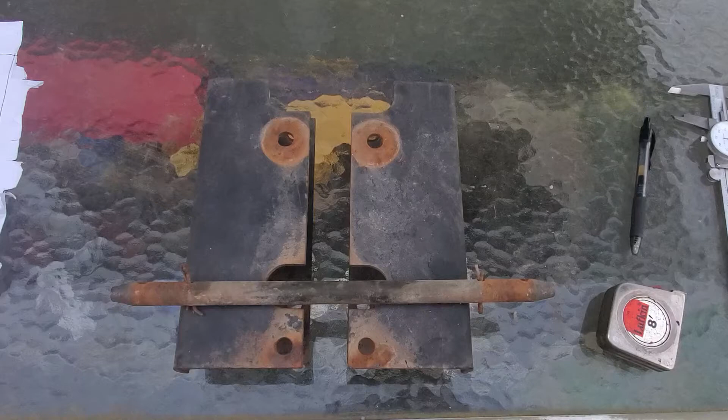Okay, everybody. This is going to be a video giving some of the measurements and dimensions of the hitch adapter for using a suburban style 3-point hitch on a more modern Craftsman GT with the slanted hitch plate on the rear that normally just uses a sleeve hitch. This is the adapter to use a 3-point on those.

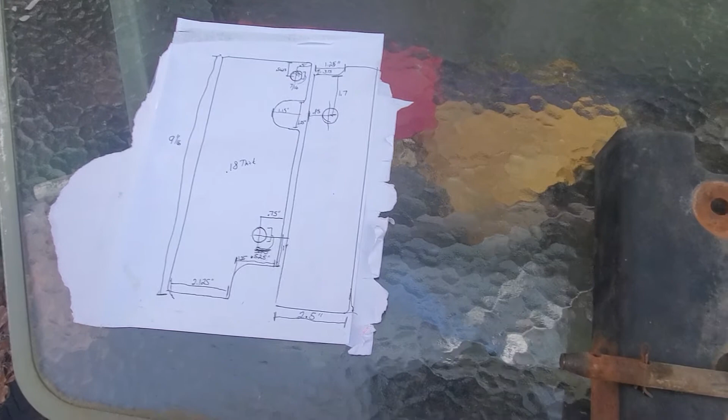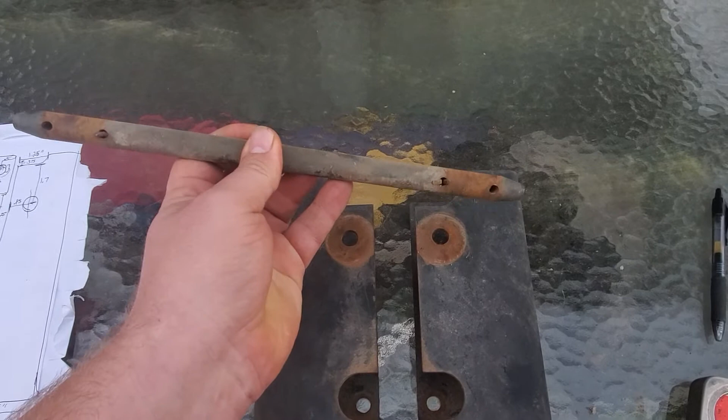So you'll have to excuse some of my measurements. It's kind of quick and dirty, but I'll do the best I can for you. First off, it's just a 1 foot long 5/8 rod for your stabilizer bars. You actually have to put a cotter pin on the inside wall and on the outside wall to keep it from just falling out.

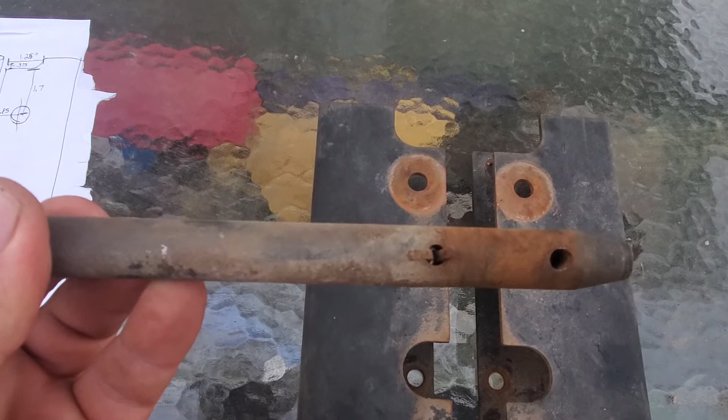So the furthest inside pinhole here with the cotter pin already in it is, I believe, 2 inches in, and the second one on the outside here is about a 1/2 inch, 3/4 of an inch in. It basically just has to keep it right here so it can't fall out either way. Okay, so that's out of the way. That's 1 foot by 5/8 rod.

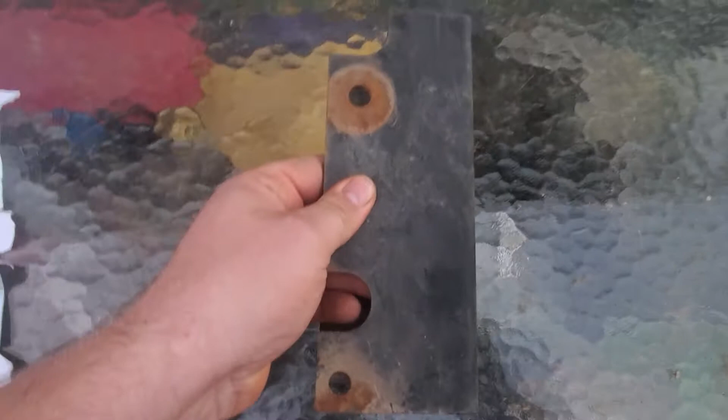Okay, now all the measurements that I give on this are going to be off of one piece. So take those measurements and mirror them to get the other piece, because these are just an exact mirror copy of each other. All right, so we're going to get started. I'm going to use this piece to start off with. All right, let me grab my pen, and we will start with this bolt hole here on the bottom.

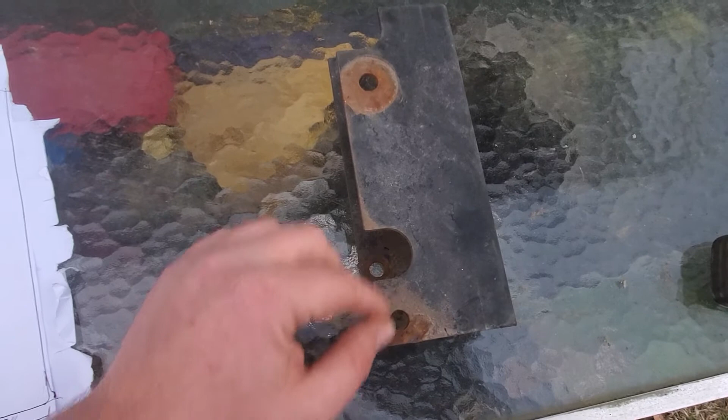This is as it would sit on the tractor. It would be sitting at an angle like this. This part in the back would actually mount to the hitch plate that's already there, and then your 3-point hitch would mount to these two holes. But you have to use on this edge, and I believe on these ones too, those funny wedge style shim washers to give it the proper kick and angle that you need for the lever to clear everything when you move the handle. But I'll get into that later.

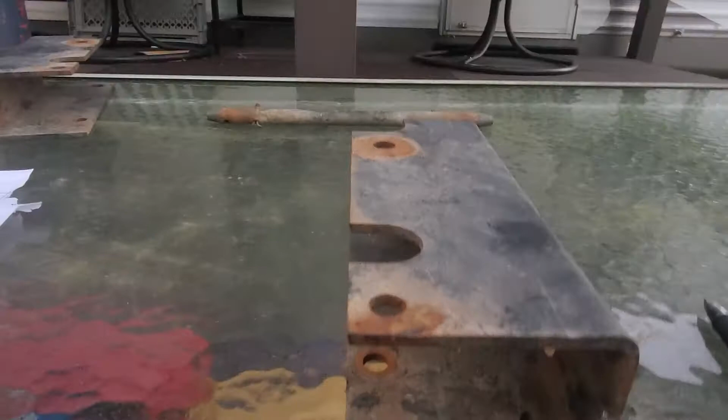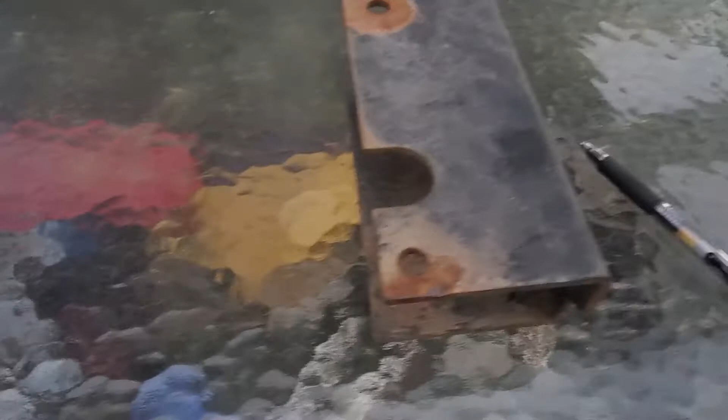First off, thickness of material. The total thickness of the metal here is 0.18 inches thick. Total height from bottom to top here, this is 2.5 inches tall. Okay, the width of it on both pieces, from this edge all the way to the outside edge is 3.5 inches. So it's 3.5 inches wide and 2.5 inches tall.

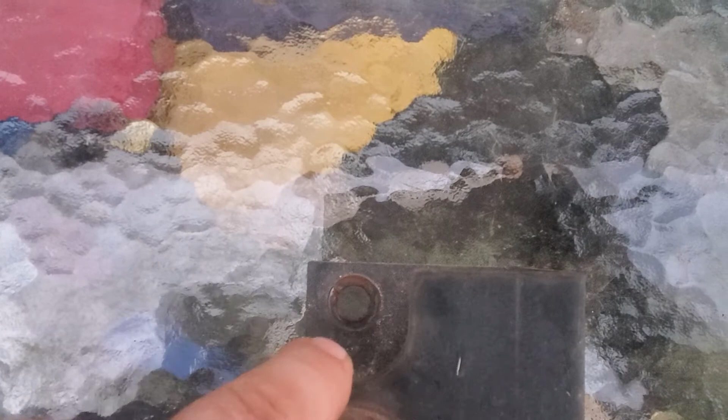It has some weird cutouts. It's got this cutout here so you can get a socket onto this bolt. And if you look on the back side here, it's got this cutout here, and I believe that's to clear the little flat place where you'd hook like a yard cart to. But the longest part of it from this edge up to the top edge, that total length is going to be 9 1/16 inches from top to bottom. 9 1/16. All right, moving along.

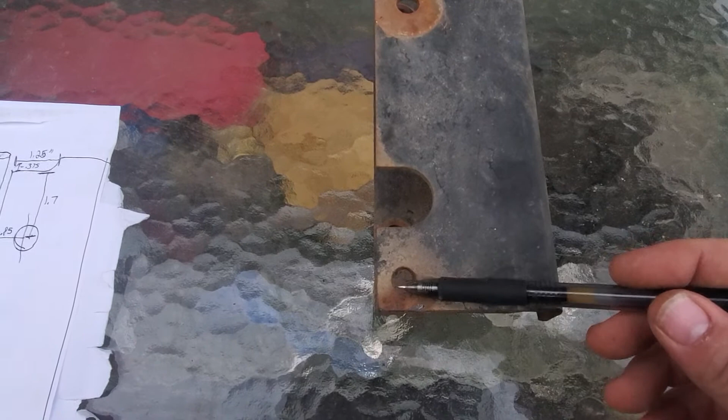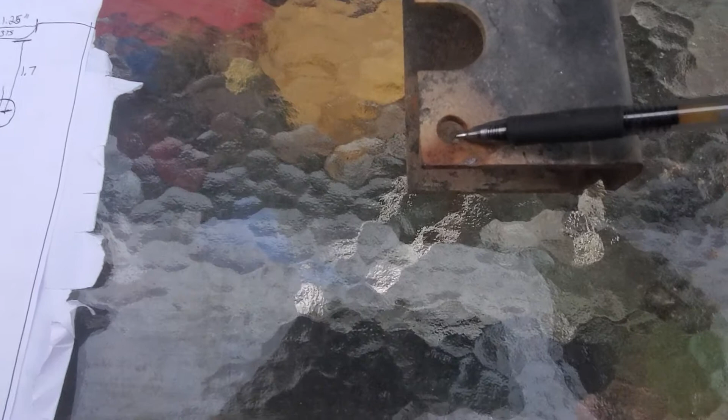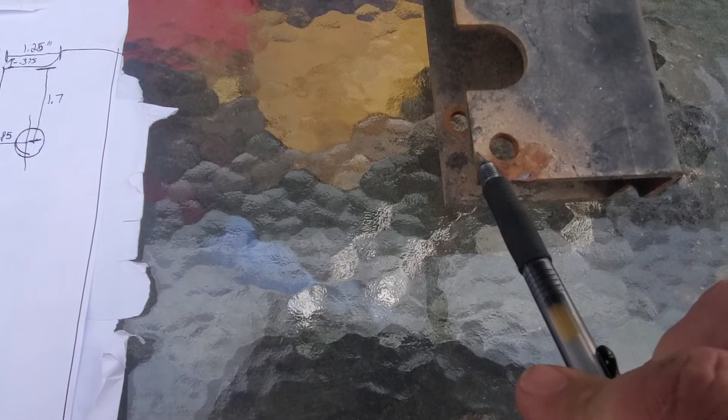The holes on the outer facing part, where you're going to mount your 3-point hitch, are this hole and this hole. So this bottom hole here is a 7/16 hole. Like I said, this is the best I could come up with, just quick and dirty measurements with a caliper and a tape measure. 7/16 hole. It is from this edge to center 0.5625 inches. From this edge to center 0.5625. From this edge to center is 1/2 inch, 0.5 inches.

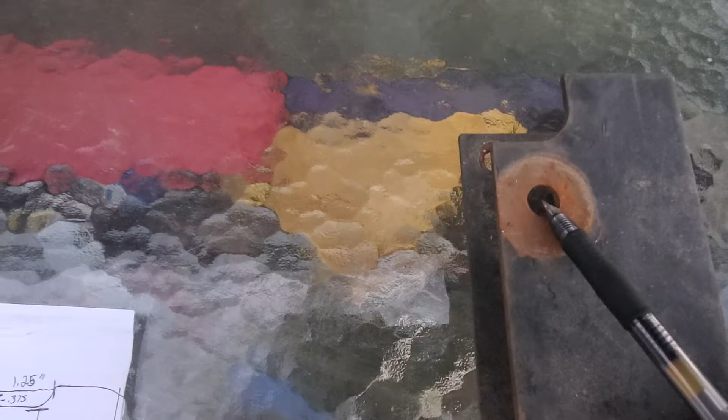All right, we'll do this one next. This hole is from this edge to center 3/4 of an inch. And from this cut to center is 1 inch. From this cut to center is 1 inch.

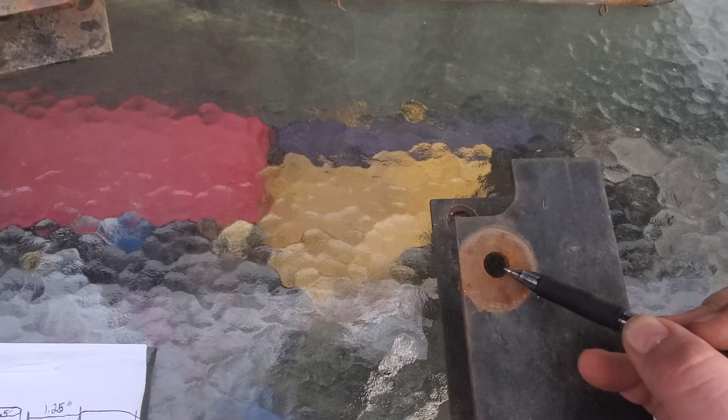And sorry, I took a measurement of this hole, and it is 0.505 inches. So you could probably get by with just doing 1/2 inch hole here and 1/2 inch hole there. I'm sure there's probably some wear on this hitch and the manufacturing tolerances, who knows what they were. So probably could just get by with 1/2 inch hole and 1/2 inch hole. Okay.

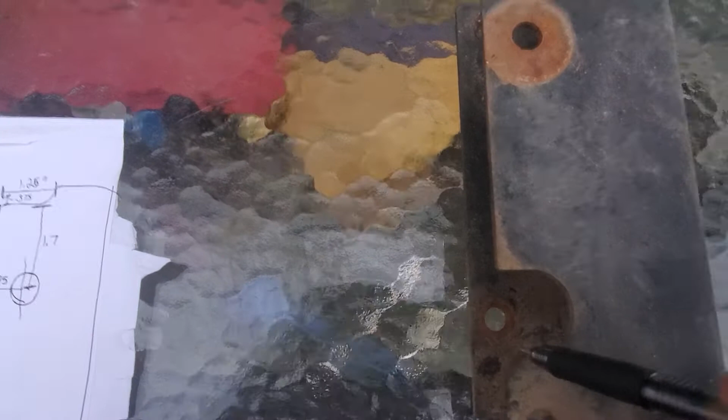This weird little cutout here is just so you can get a socket down onto this other bolt, because this is what actually bolts to the hitch plate on the tractor. So you could just make it whatever you need it to be to clear a socket to get to that bolt. But if you want to do it as close to the factory spec, and to what I measured, as possible, this gap from here to here is 1 1/4 inches, and the depth of it from this imaginary edge to here is 1.15 inches.

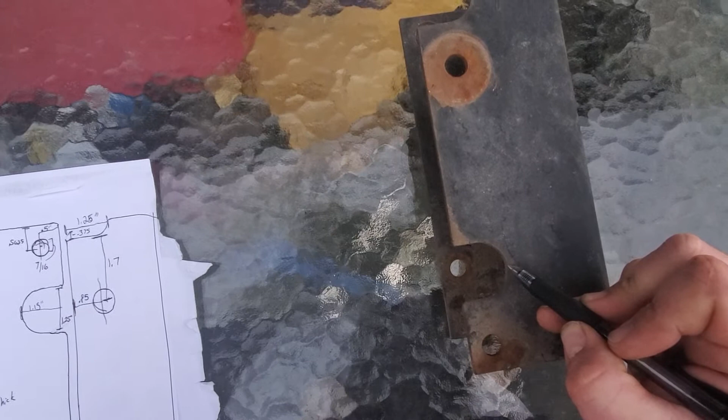I didn't get a measurement as to where to start. I can go ahead and do that right now. Let's see here.

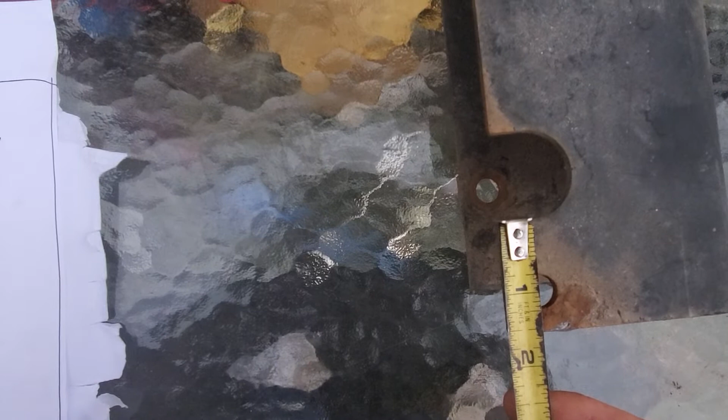All right, that edge is going to be, let's see here, 1 and, is that 5/8? Yeah, we'll call that 1 5/8. 1 5/8 to start this edge to cut, and you make it around. Okay. This little notch here, same deal, is just cut out to allow you access with a socket to this bolt.

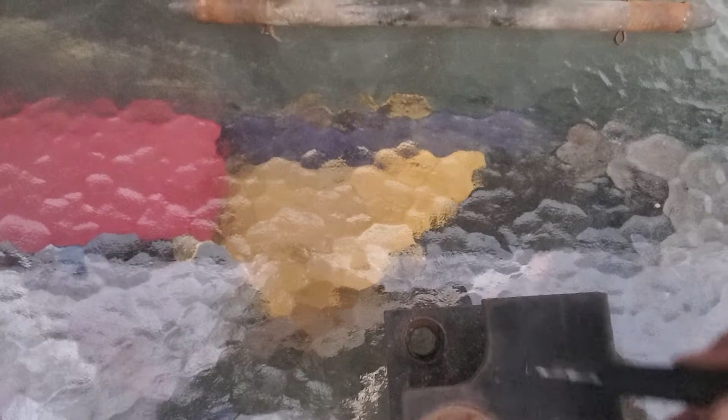This cutout is, let's see here, depth from this edge to square with here is, shoot, didn't measure that one either. Okay, this corner to square with here is 1 1/4. Now, I'll bet, let's see, yeah, 1 1/4, 1 1/4. So you just make this 1 1/4 square cut, and you can bevel it however you need to. If you don't want to, I don't care. All right, let's see here.

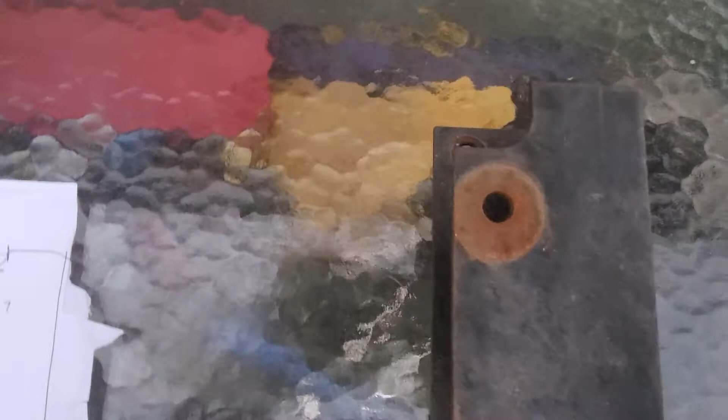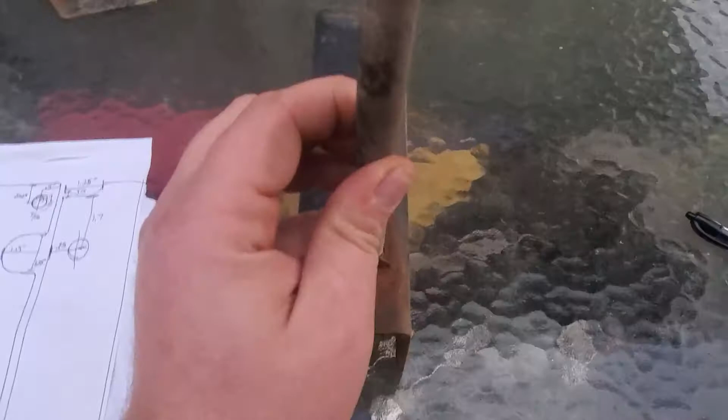Now we're gonna roll this. All right, this is where your 5/8 dowel is gonna go through, and you can see you got to put it in from the inside first, and then assemble the 2 halves of the hitch on top of the pin.

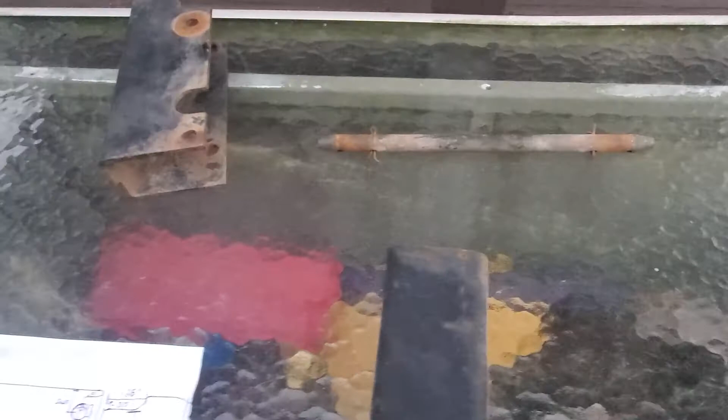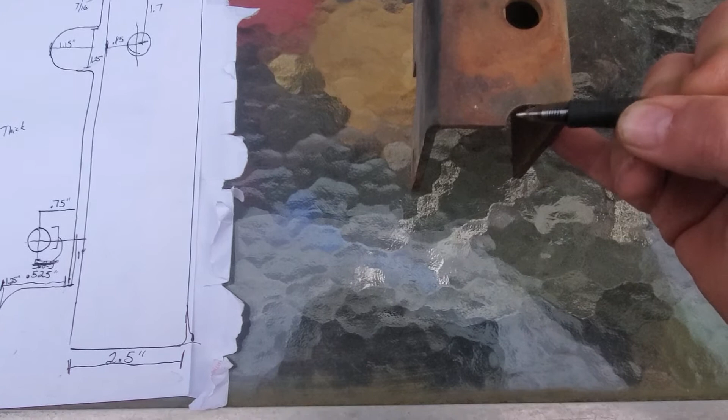Okay. This little cut here, this one here, is, let's see, from this edge to the outside edge of here is 1 1/4 inches. And the height of it, this gap here, is 0.375 inches. Okay, now we're going to continue to roll this.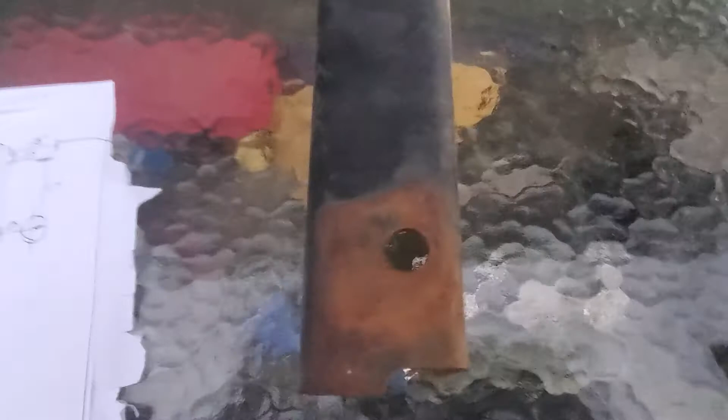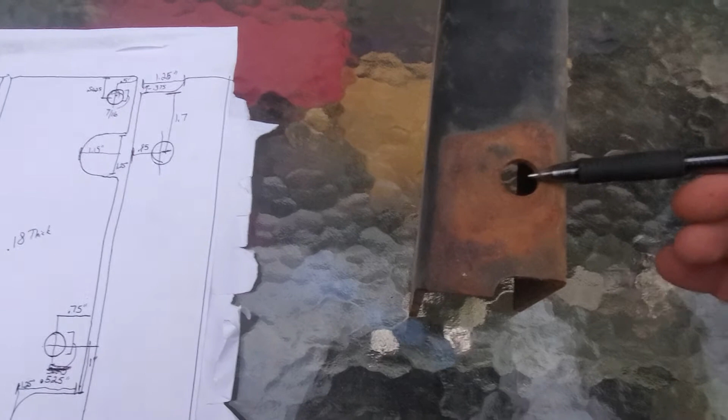Oh, this hole here, that's just a 5/8 rod has to go through it. So you can drill it whatever size you want to accommodate the 5/8 rod, or depending on if you're going to try to put like a true cat 0 on there and you're going to change the size or something.

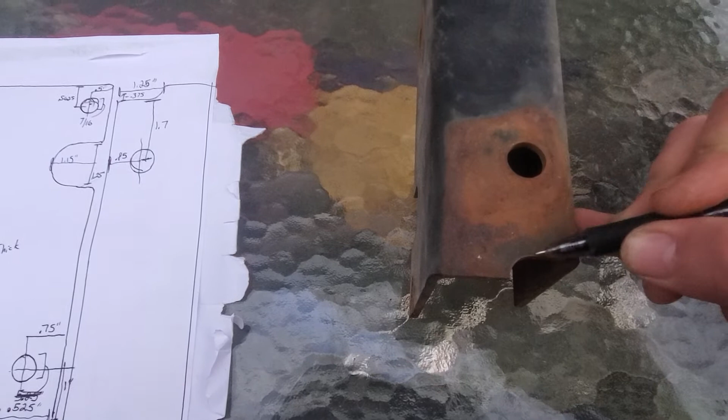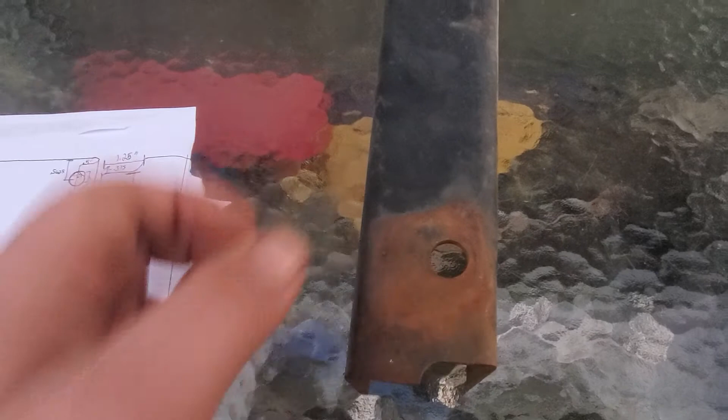But the size of this hole that I measured is, what did I say? It's 5/8 hole from this edge to center is 1.7 inches. From this edge to center, 1.7. And from the outside edge of here to center is 0.85 inches. 0.85 inches. All right, that should get you going on there. Now we're going to roll it over.

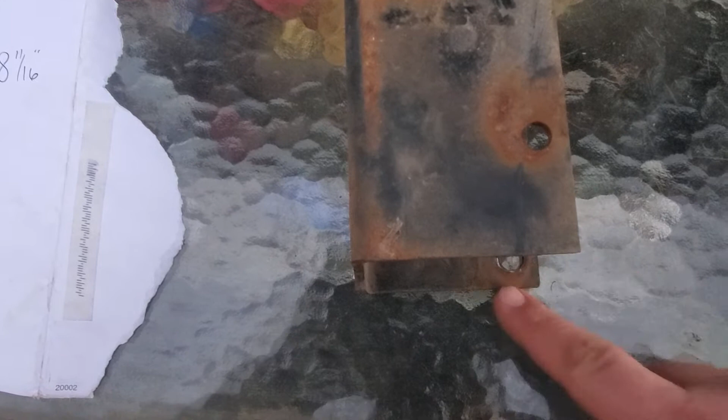All right, this is a pretty simple side. I'm going to flip my paper over. All right. Now, that cut that you made on this edge is going to follow all the way around on this edge. So it's going to be 0.375, like 3/8 of an inch shorter than this back edge. So there'll be a difference there. So that's where we're going to start measuring from, is here.

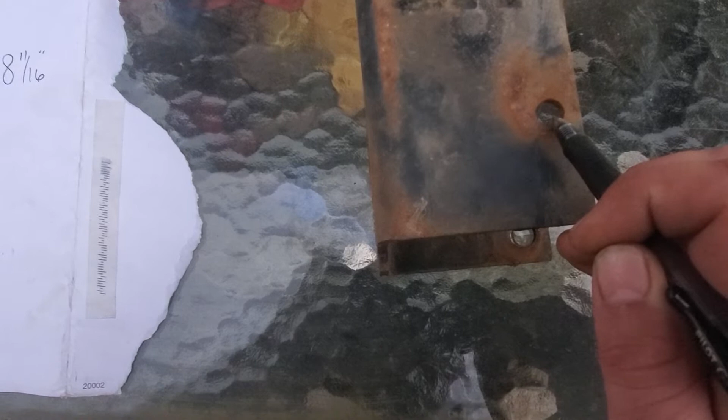Okay. From this edge to center bolt hole is 1.8 inches. 1.8 inches from here to this edge. All right. From the outer side edge here, from here to center is 1/2 an inch. And this is a 7/16 hole. 1/2 an inch from edge to center, 1.8 inches from edge to center.

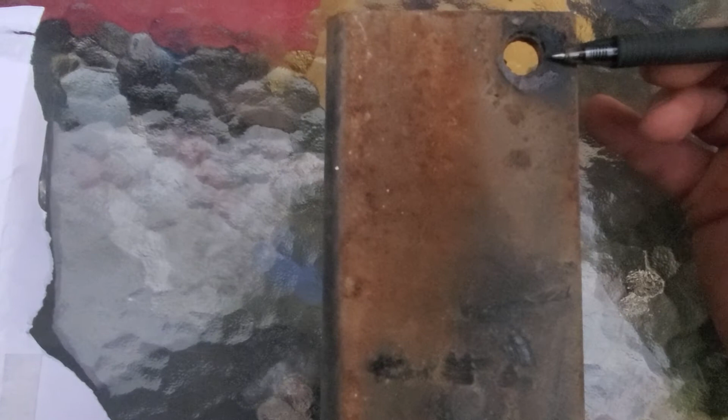All right, we're going to move up this side. This bolt hole is another 7/16, and from top edge to center measured 0.6 inches. So just a little over a 1/2 inch. And from outside edge to center is 3/4 inch, 0.75 inches.

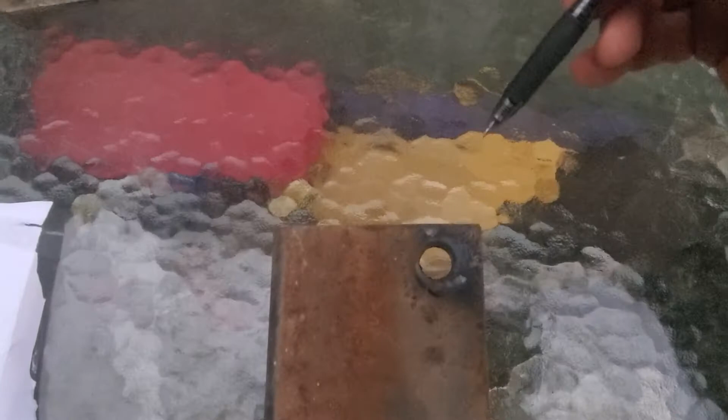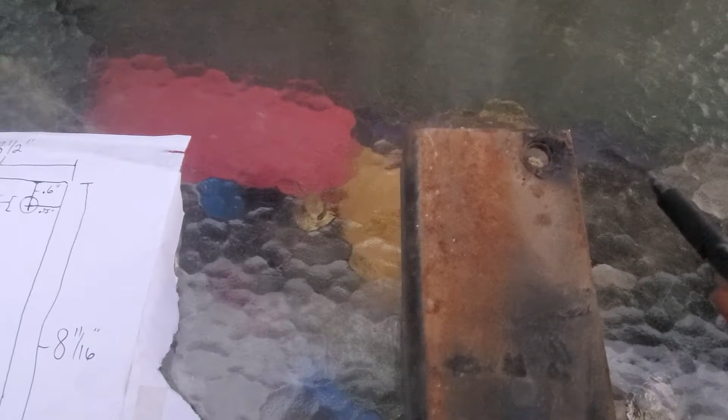Yep. So this edge, once you make this cut, this edge should end up being 8 11/16 inches long. And like I said, this whole thing is 3.5 inches wide. I think that might be about it.

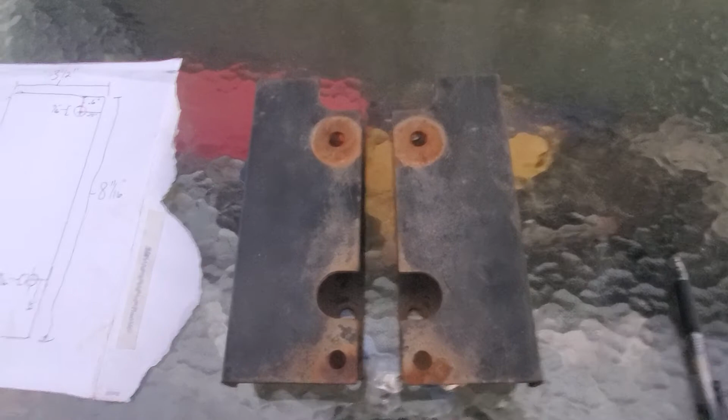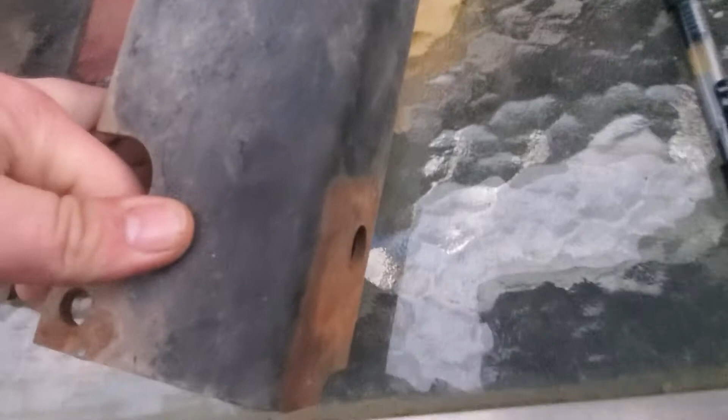Yeah. So when you go to put this together, you have to put the bar inside first, and that cotter pin stops it from going through. And then the other bar, I'm trying to do this one-handed, the other side, come on, there it is. Okay, the other side will go on like that. All right, and that gives you your pivot bar for your support arms. And then your arm would go on here, and then you put your cotter pin through to hold your arm on.

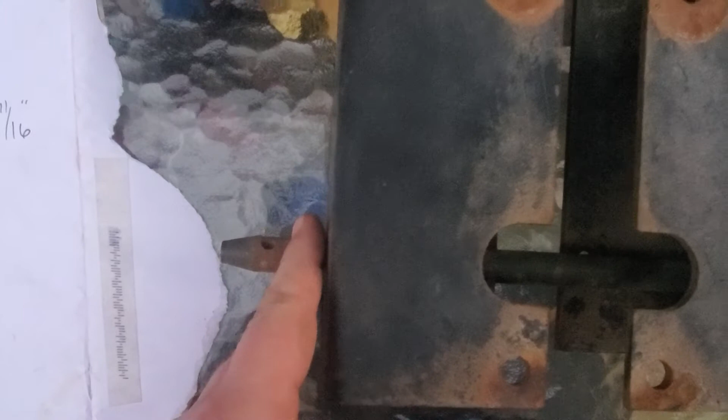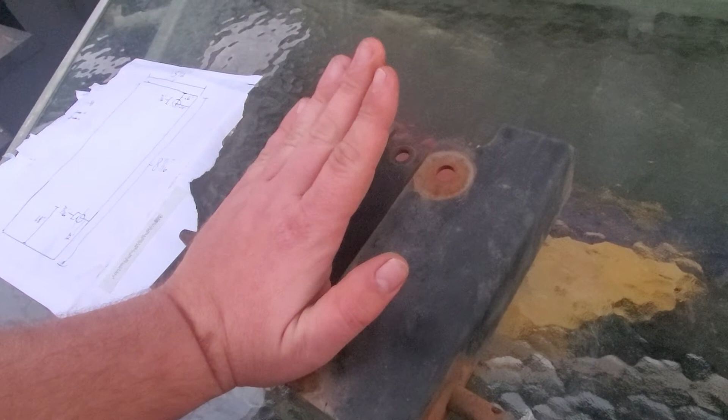Yep, and then your 3-point hitch would bolt on here with the wedge washers and spacers to give it the angle that it needs. You can get really creative with that if you want to. I just happened to find the whole kit off of a tractor a guy had for sale that came with the wedge washers and spacers, so I'm going to use them. But you just need to kick it out, I think about 2 inches or so at the top maybe, and however you can at the bottom, about 2 inches at the top.

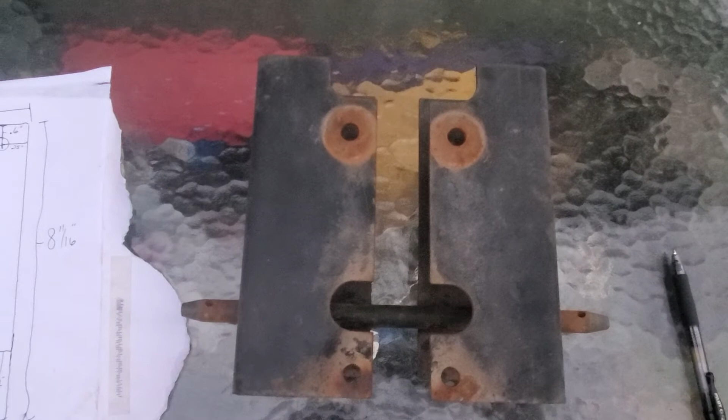Now this one did come with the long arm lever, so it's gonna clear the fenders on GTs. I don't know if a regular medium length arm on a 3-point is gonna fit on a GT, or if only the long ones will. It does have to be a 4-bolt 3-point hitch. I know the really early Suburbans had the 2-point hitch with a really short arm on them. Those aren't going to work on here, I don't think. I could be wrong. I've never had one of those hitches.